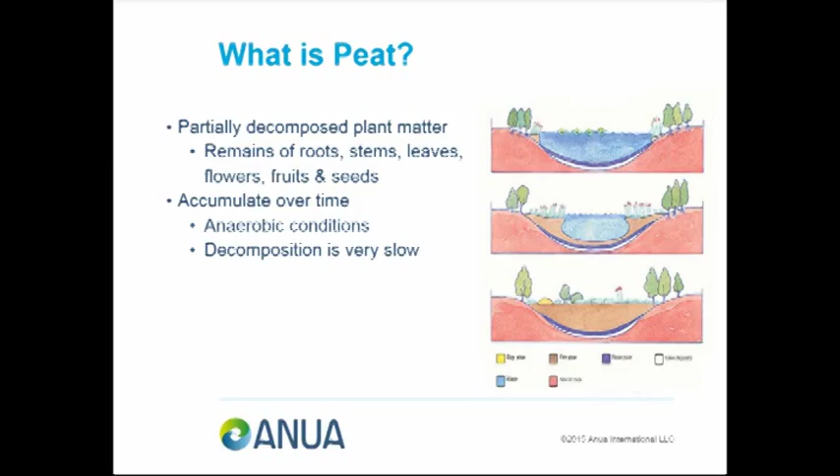So why is the fiber a superior treatment medium? If we compare it to the North American peats, whether it's fiber or sphagnum, you'll see that the lignin content is twice as much. So one of the common questions with peat filters is how long does the media last? Because it's an organic material, and over time it will slowly decompose. So with the high lignin content, over 50%, the Irish peat will generally last about 15 years.

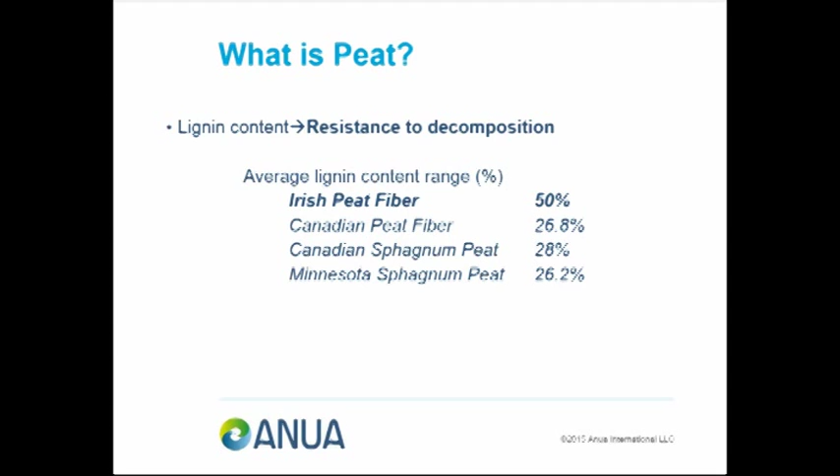We've had many systems that have gone over that. Sometimes systems go less than that, but on average we say 15 years. And if you compare that to the different North American peats, it's about twice the lifespan. So a lot of times you'll see from other manufacturers, it might only be 7, 8, 9 years, something like that.

So there's been a lot of studies that were done actually in the late 90s and the early 2000s. If you've been in the industry a long time, you can remember the 90s was a time when there was a lot of research going on. A lot of universities were involved in different research. And so the University of Minnesota, where they actually have a lot of peat resources, actually wanted to study all different types of peat and do different configurations of peat filters to see how the performance compared.

And so the summary of all that study, which actually lasted 5 years, was that the coarse fibrous peat was actually the most preferable. And of course, like all media filters, we always have a balance with any media system. We're trying to maintain oxygen transfer as well as move the effluent. So it becomes a game. If it moves too fast, then we don't optimize treatment. We don't have time to do what we need to do.

If the pores are too small and it moves too slow, then that leads to clogging, which if you've ever dealt with different media filters, whether it's even a mound system as a media filter, sand filters, you've probably witnessed clogging of those filters. You can even think of soil as a media filter even in a conventional system. So, one of the things that's great about the peat fiber is it maintains those air spaces and channels.

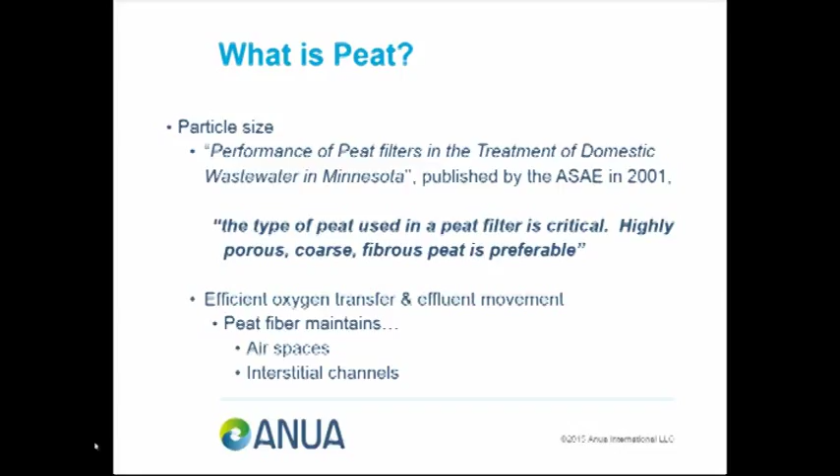And as you'll see here in a minute, the next slide, you'll notice how the properties of it facilitate both of those. So we retain water 36 to 48 hours, which of course is much longer than most other types of media. And you'll see later that's one of the reasons why you get really good pathogen removal as well as very high ammonia removal. The void space, of course, is very high, well over 90%. There's a high surface area.

And then the big kicker with all of it is the cation exchange capacity. So with a natural media, it actually is charged. You can go to the store and buy air filters that are electrostatically charged. They're there to grab particles out of the air as it goes through the air filter and attract it to it. And the same is true of a peat media. You're going to attract and hold molecules so that it actually can be further transformed or will actually be adsorbed and bound.

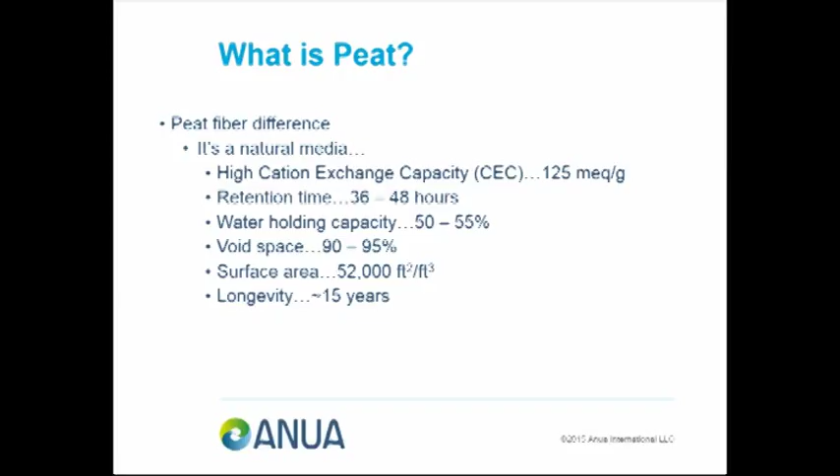So if you compare, just to give you an idea, when you look at that scale of 125 milliequivalents per gram, that's a very high number. If you compare that to sand, like a very sandy soil or just sand, like concrete sand, that would be very low, single-digit numbers, probably 0 to 5, somewhere in that range. So we got a little video here for you that is going to show you an overview of how one of these systems works.

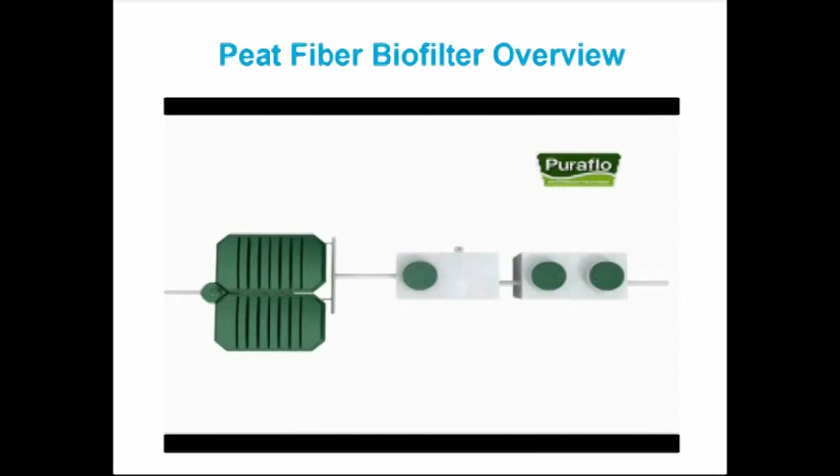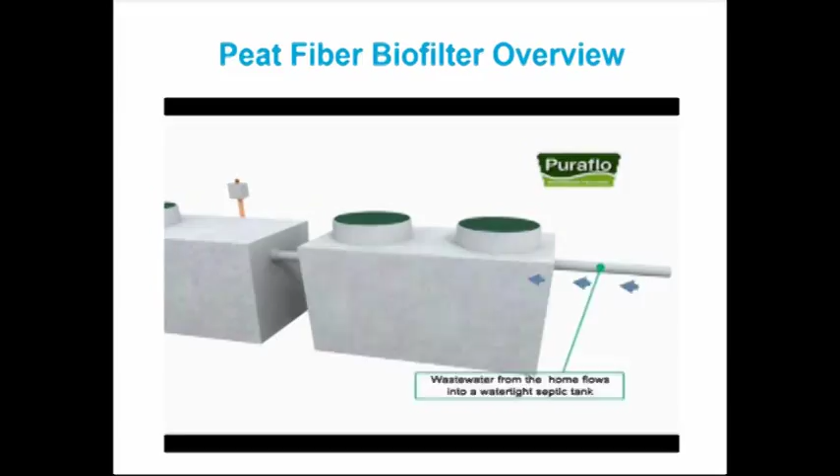All right, so you see the overview, bird's eye view. So basically we're just going to start with a conventional septic tank. These are typically going to be sized to state code or county code, or local code. And so obviously we want it to be watertight. That's critically important. You'll see that this is a time dose system, so if we don't have a watertight septic tank, in addition to treatment problems, it's going to create other problems for us as well.

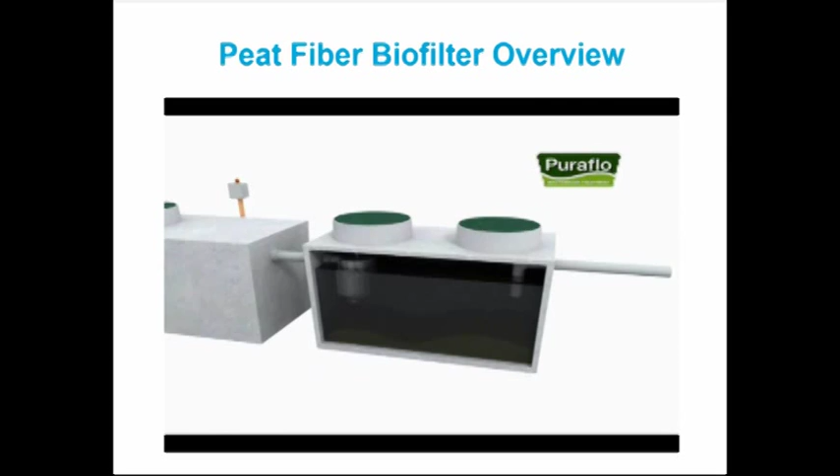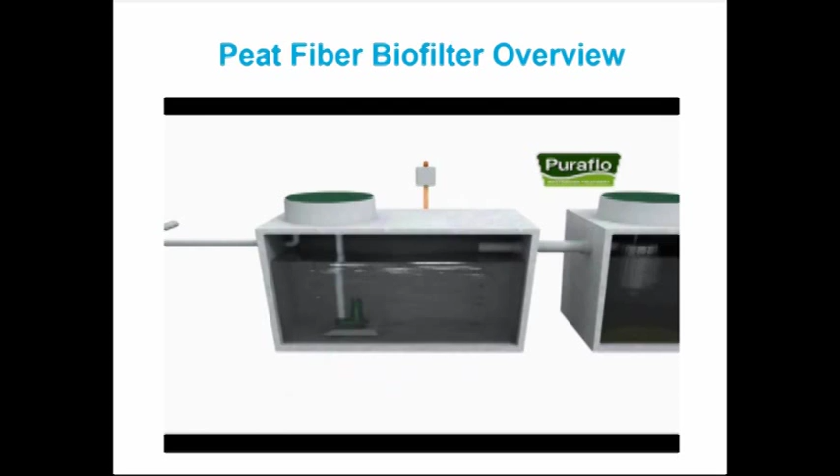And then that flows into a time dose pump tank where we typically are going to dose once every 2 hours. It's a single pass system generally. We do have recirc options available if you need enhanced nitrogen reduction. But normally we're going to use a low head effluent pump, which is all you need, because the most that pump's going to be running in a day is maybe 12 minutes or so. And then you're going to dose the peat fiber media.

You see the manifold there, and so the pressure point is actually the little union there. There's a 1/2-inch orifice disc, and that's where you're actually going to design to pressurize. So in this case, if you have 2 modules, it's equivalent to pressurizing 2 1/2-inch orifices. And then this shows the piping method. So if you had a separate dispersal field and you went out to, say, gravel trenches or chambers, or if you wanted to collect it to pump to drip, then you would use this methodology.

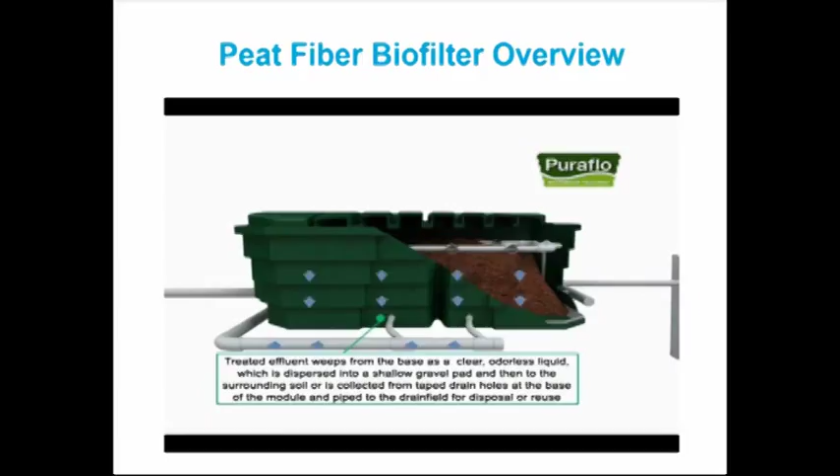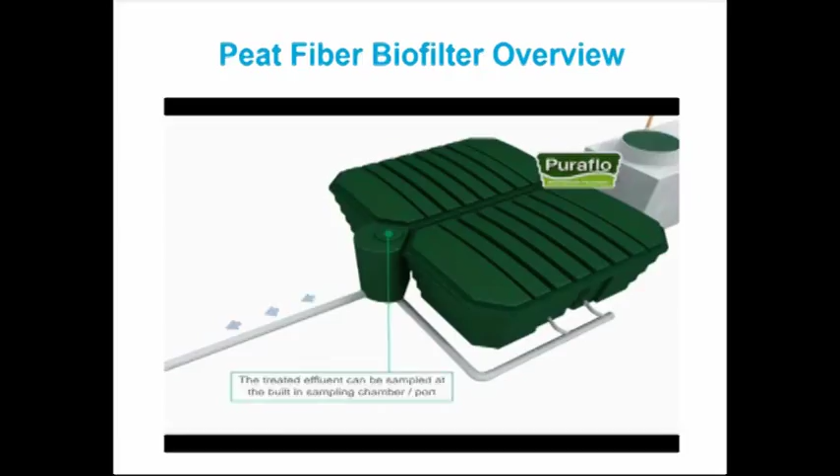The more popular method that we typically see is with the weep holes, where the base of the module has weep holes all around it, and we have a gravel pad underneath it, so the modules are actually sitting directly on top of the drain field. And then one of the things we always try to advise people is to have the sample chamber. We want to be able to see the effluent. We want to be able to sample it if necessary, and so it's critical that you have a way to do that.

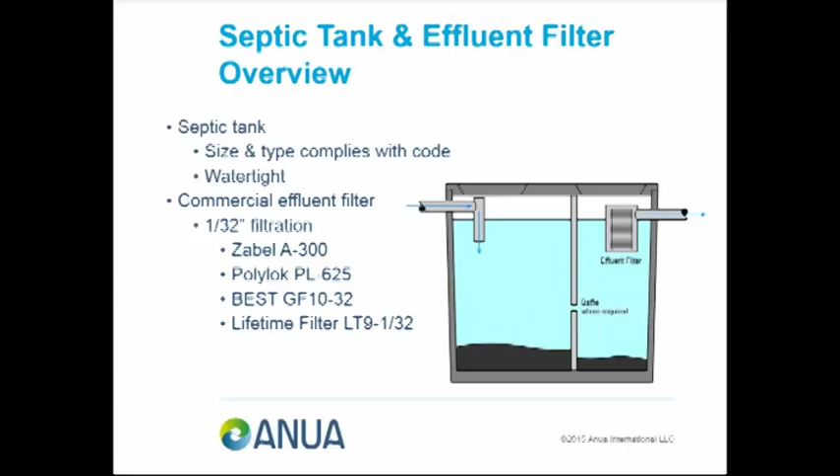All right, so the first part of a system is a septic tank, as we mentioned, so watertight, sized to code. The next key component is the commercial effluent filter. We've had commercial effluent filters in our systems for over 20 years. One of the questions we get is 1/32 filtration is very small, and have you seen issues with those filters and clogging? Fortunately, one of the things we have is experience of time with this system. Because they're a commercial filter and they have a lot more area than like a 4-inch filter, we see the maintenance frequency goes pretty long on these, and also you get the better filtration. So there's just a list of the companies or models that are 1/32 filtration.

And then the pump tank, again, this needs to be watertight. One of the things that we do is we have a separate pump tank from the septic tank. One of the nice things about this we found over time is that you just don't deal with the nuisance high water alarms that you might with other systems that tend to combine everything in one tank. So when you have all that surge volume, it's really nice for when they're having parties or people over, that type of thing.

So typically, like we said, it's going to be dosed 12 times per day. That's only if the flow is there. So in a low flow situation, it may not even be 12 times a day, but it's going to be a 2-hour off cycle. The key part of it is just to separate in your mind the dosing rate and the dosing volume. Each module, which you're going to learn about here in a little bit, is 7 to 12 gallons per minute for the pump, and the dose volume is 5 to 15 gallons per dose per module. So those are two ranges of numbers you need to be familiar with if you design a system.

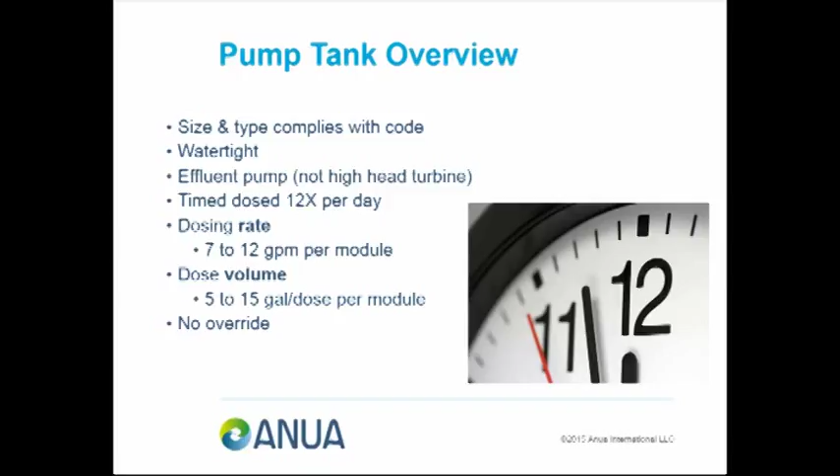The other thing we like to do is have no override, and we do that for a few reasons. If you override a system, obviously you can throw a lot more water through your treatment and onto the drain field. That's not a good thing, because you don't optimize the treatment. And also, really, it's a violation of the permit conditions, because most permits are rated at a max flow per day, and you could end up with an override situation where you might be putting thousands of gallons a day through a system potentially. So we highly discourage use of override floats in the system. All right.

And that just shows you a general picture of how we would see a pump tank set up. Now, some people get a little creative. You can combine, like Jensen, of course, is a big concrete company. They have the ability to manufacture the septic and pump tank into one tank. I don't think that's an issue for them. Most of the time, though, you'll see them as separate tanks. But it's a really basic setup, low maintenance, not a lot to deal with other than the floats working and making sure the pump works.

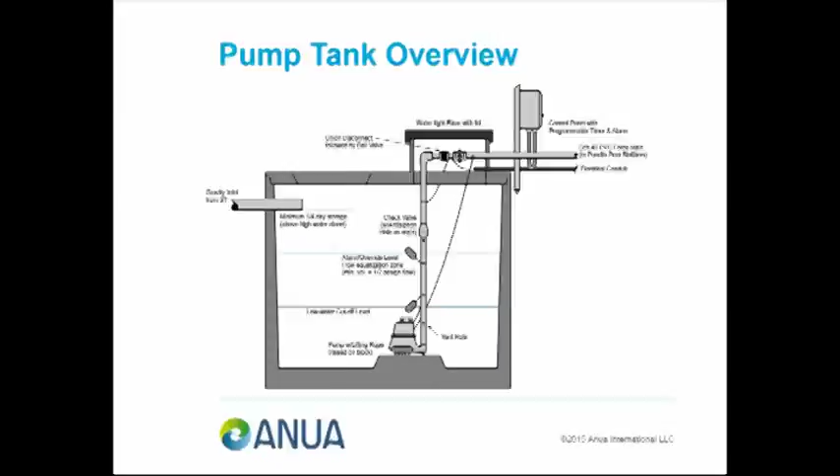As we mentioned with the cation exchange, one of the nice things about the peat fiber treatment is you get all 3 types of treatment. All the alternative systems or advanced treatment systems are typically going to do biological treatment. That's kind of a given. When you get into the media filters, you also get the physical filtration and absorption. And then with the peat, you get the third benefit, actual chemical treatment, where you get adsorption and ion exchange.

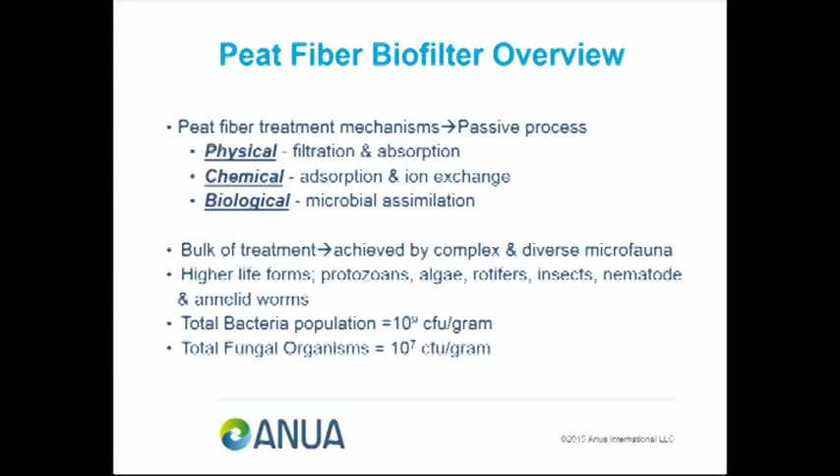So it's probably the only technology, these natural media filters, that actually gives you all 3 types of treatment. One of the things you'll see is it's not uncommon, if you're doing maintenance, to see higher life forms inside the filter. You get beyond just the foundational level of bacteria performing the treatment. You move to higher chain organisms that are actually better at treatment and produce less waste, so that's a benefit. You have a lot of biology going on there. You'll see a lot of bacteria, fungal species, things of that nature.

And of course, in most media filters, the top portion is where you do your carbonaceous breakdown. Normally the chain of utilization is carbon, nitrogen, and phosphorus. That's why you see carbon come out in the top part of a filter, and in the bottom the nitrifiers populate because they can't compete with the organisms that take care of the carbonaceous waste. So typically the deeper parts are where you'll see nitrification, and in peat filters you'll see little pockets or microsites with anoxic areas, which provide denitrification because you have an organic source available.

So even in single pass, we'll typically see nitrogen removal anywhere from 25 to 40%. And when we go in recirc mode, you'll see nitrogen reduction levels upwards of 70%.

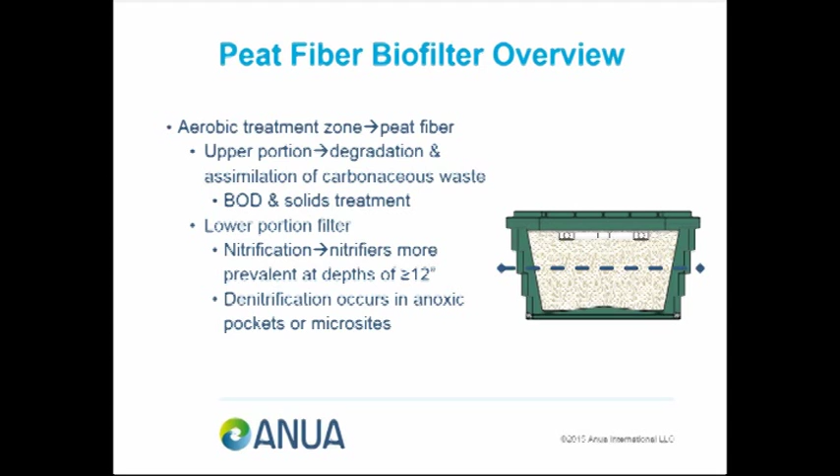Hold on just a second. You have to excuse me. I'm up in Ohio here, and there's something blooming that's really hitting my allergies.

One of the real benefits that sets peat filters apart is the antimicrobial properties, or what you would call microbial antagonism. With that retention time of 36 to 48 hours, you have a long time for stuff to work in there. The peat lowers the pH, and that lower pH has an effect on the pathogenic bacteria and viruses. With the fungal species, you also get some benefits. So we see very high levels of pathogenic bacteria removal and 100% removal of viruses.

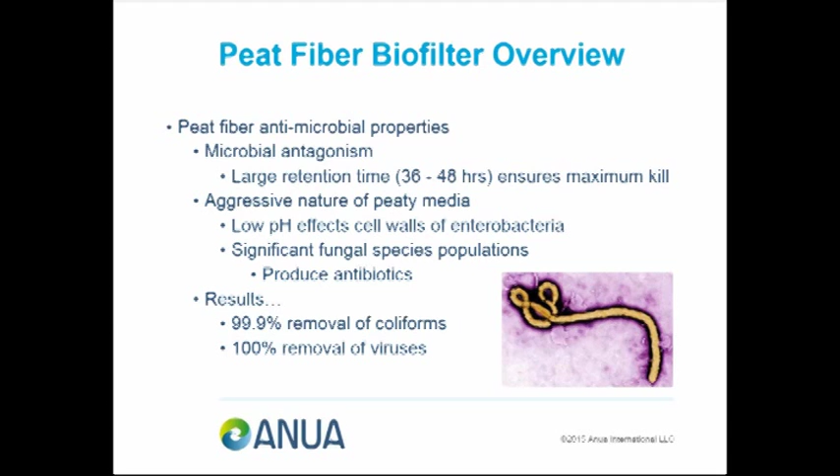When this was first researched back in the 80s and early 90s, they did tracer studies, and one of the studies on pathogen removal showed very high levels like what you're seeing there. There was a study done in Minnesota later in 2000, and just for disclosure, this was not the peat fiber from Ireland. It was another peat from Minnesota, but it demonstrates the difference between peat and sand in terms of removal of viruses.

You see there's virtually 100% removal of viruses both summer and winter. In Duluth, Minnesota, they're very interested in how systems perform in cold weather because they have cold weather 8 months out of the year. If you compare that to sand filters, you'll see there was a drop-off in the wintertime. The other interesting thing, if you go to the next slide,

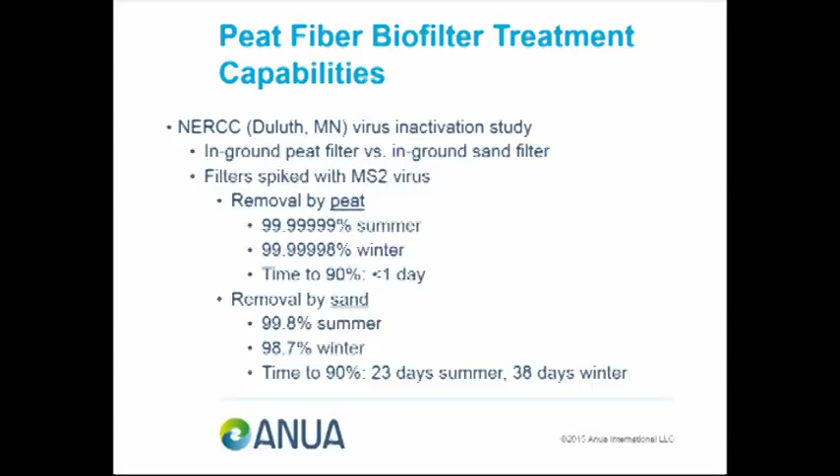is it shows how long it takes for virus inactivation. In peat, you tend to see virus inactivation in less than a day. Compared to sand, it takes upwards of 23 days plus to see over 90% virus inactivation.

This is all very interesting because we try to talk to people about treatment beyond BOD and beyond suspended solids. We want to get into other things, and it becomes very important in water reuse to know about pathogens, nitrogen, and other emerging contaminants, depending on how people are going to reuse the water.

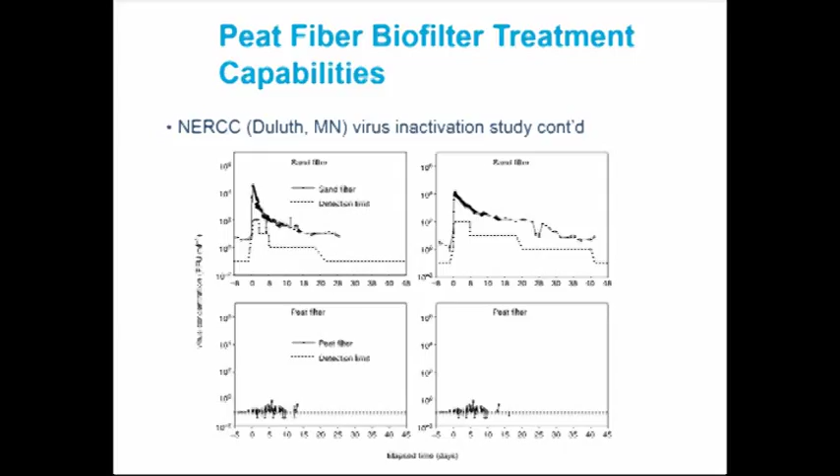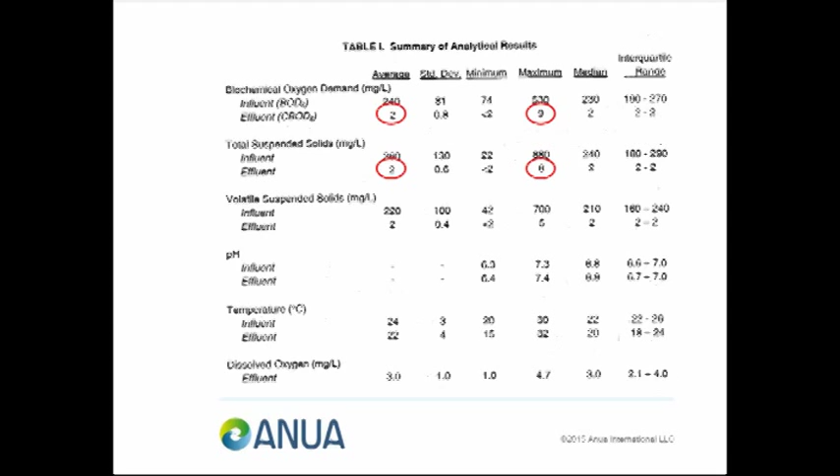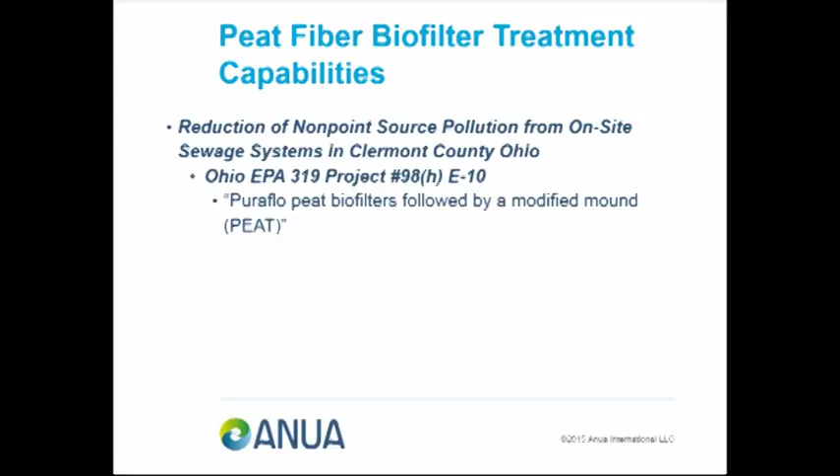So we've been part of a number of third-party studies all across the country. A lot of these took place in the late 90s and, like we said, early part of 2000. One of them was in Ohio, down in Clermont County, which is outside the Cincinnati area. And it was funded by the Ohio EPA as a grant project. And they had 8 systems that were actually Puraflo systems, followed by shallow profile mound systems. And you see the next couple slides here, we'll see the results.

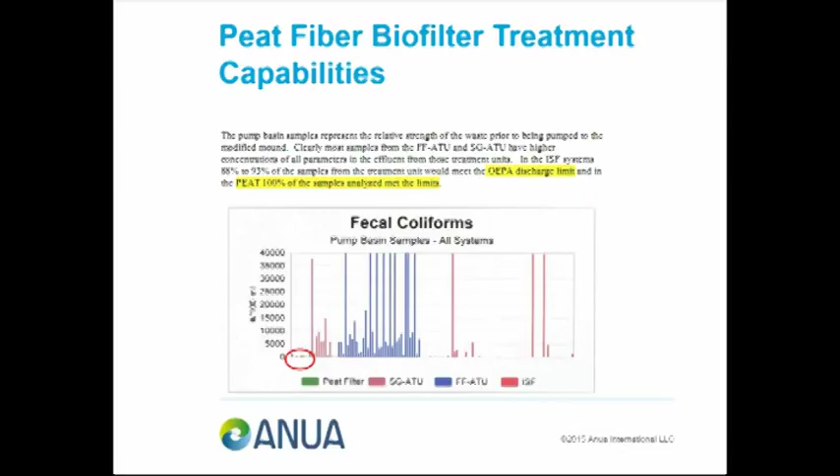So the first one is the fecal coliform. The peat filters were the only ones that 100% met the limits of the sampling limits that they had. And in this case, the sample limits that they had on fecal was 2,000. And you can see there was a suspended growth ATU, fixed film ATU, and an intermittent sand filter. And you can see the difference there in the graph.

The next one was ammonia. So Ohio is a big direct discharge state. They do a lot of surface discharge to ditches and streams, and so they're very worried about the ammonia. And again, it was the only system that 100% met the samples. Currently in Ohio, those numbers are very low. I think back at the time when this took place, it was 2 and 4, 2 in the summer, 4 in the winter. And you can see the difference between the Puraflo and the other technologies.

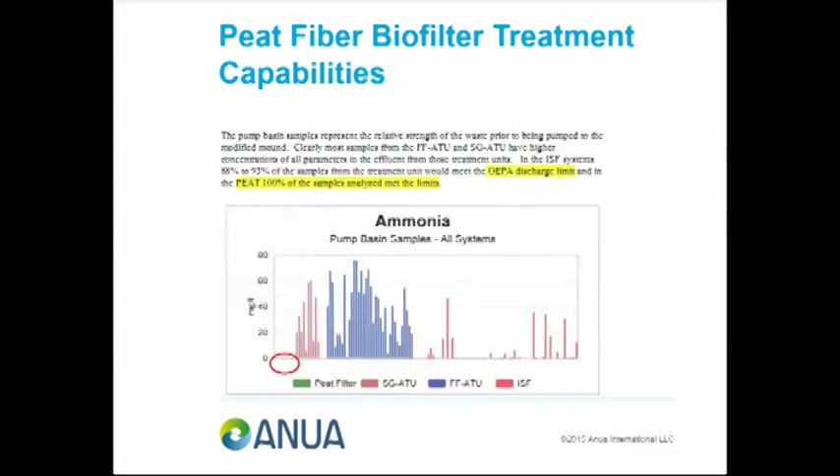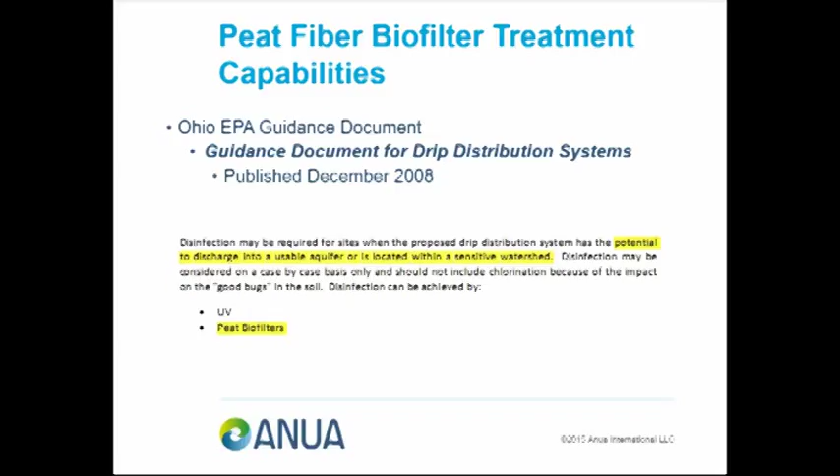And in the drip distribution guidance document that the Ohio EPA published, they actually have this statement, which we found a few years ago, which is very interesting. It talks about discharging in sensitive water tables, because it's not uncommon to get water tables up here in northeast Ohio that may be 6 to 12 inches below the surface. And so they don't want to obviously put chlorine in those situations, so it discusses other types of disinfection methods, and one of them it lists is peat biofilters, which is very interesting.

So the next part, we're going to move on to the soil and the drain field. So we like to talk about that the Puraflo is actually the circuit breaker or the fuse for the drain field. So what you don't want to have happen is your treatment system not perform reliably to the point that you still end up plugging the drain field or having clogging issues or hydraulic issues. So we feel it's very important to be able to manage that, and Puraflo allows us to do that.

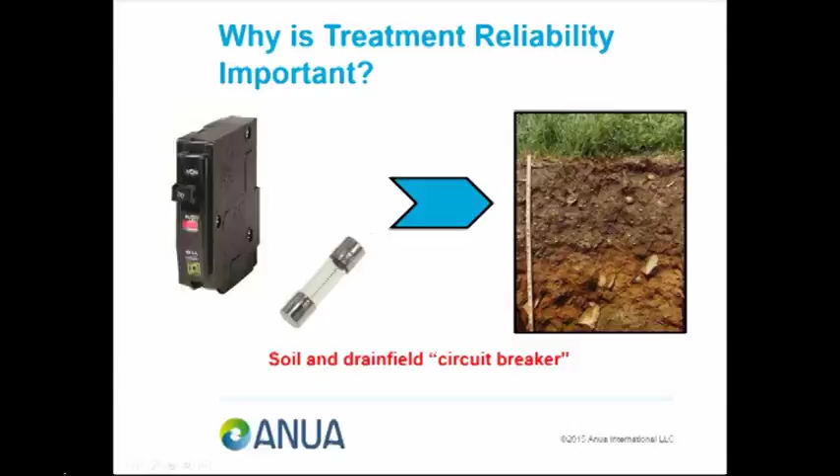We have another poll question here, so let me open that up for everyone to see. And the question is, in your local market, do you see more opportunity for repair work or new construction? So I'll give our attendees a few minutes to answer that. Okay, it looks like all the answers are in, and we have 29% of our audience saying repair work and 71% new construction. Interesting. All right.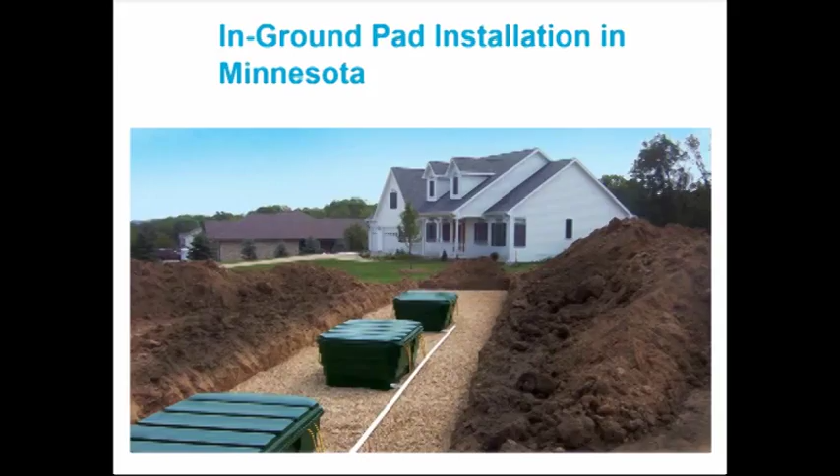So then moving on to the next slide, this is a site up in Minnesota. Obviously you don't see the septic or the pump tank, but this is a typical configuration where you would have the gravel, what we call the in-ground pad, beneath the modules. Just ignore the color of the gravel. This particular gravel is tan for some reason, but I know most people's is gray. And then you would just space the modules evenly throughout that pad, and then you have the pressure manifold coming in, supplying the modules from the time dose pump.

So it's really simple. So everything will be backfilled, and you'll see some pictures here in a minute. The only thing that is on the surface is the lids, which are accessible for the service provider to be able to see what's going on in the filters.

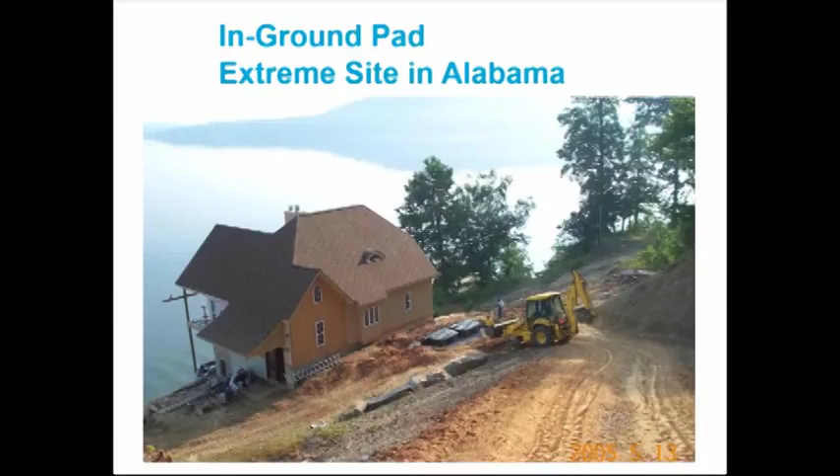So this site in Alabama is typical of the situations we get into. Heavy slope on a lake, no room. Matter of fact, I just worked with an engineer in Mississippi that worked on a site with a 45% slope. They notched into the 45% slope hill, cut out a bench for the house and the Puraflo system, and then that was it. So we deal with what we like to call extreme sites all the time. So you see the modules in the front yard with the gravel beneath it; that is the treatment and the drain field in that small space.

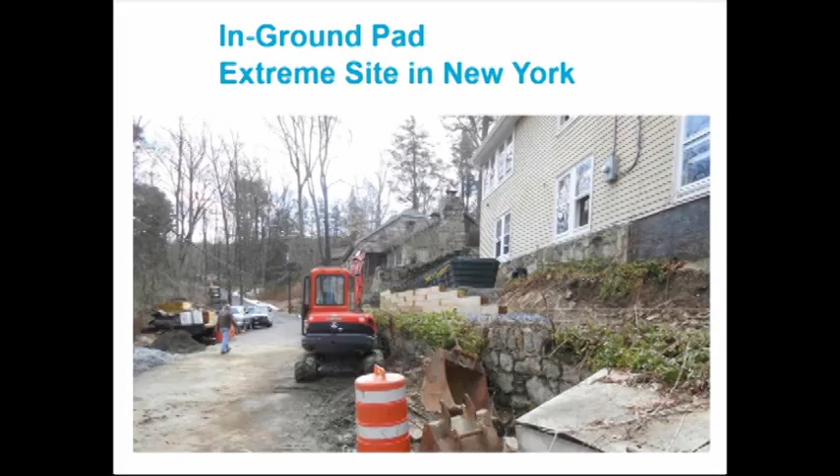And then here's a site in New York. So it's interesting, the poll that we took. This is a repair site, and that's all the space they have, next to the house in between the street. And so that is the modules with the drain field. That is your treatment and dispersal system right there.

So now we'll talk about mounded pads. So those of you that are familiar with Wisconsin mounds, where you scarify the native soil, you lay some sand down, then you have a gravel layer, and typically you would have a pressure manifold there supplying from a pump tank with septic tank effluent. So what we do is we put the Puraflo modules instead of the pressure network. Now you have treated effluent going into the mound system.

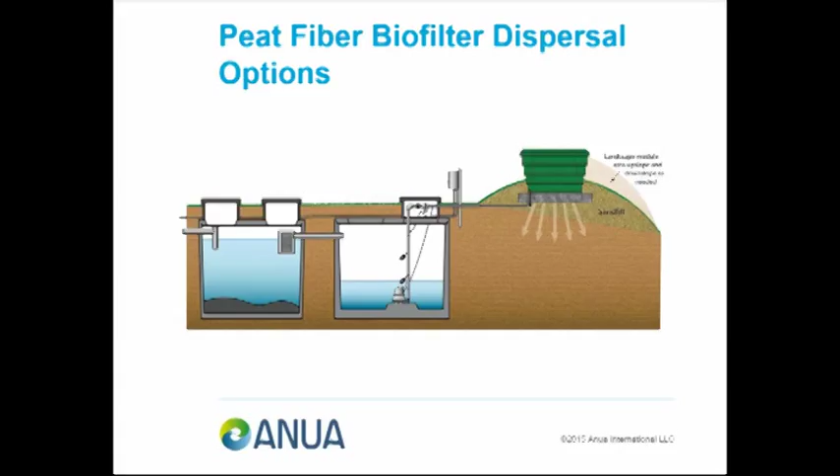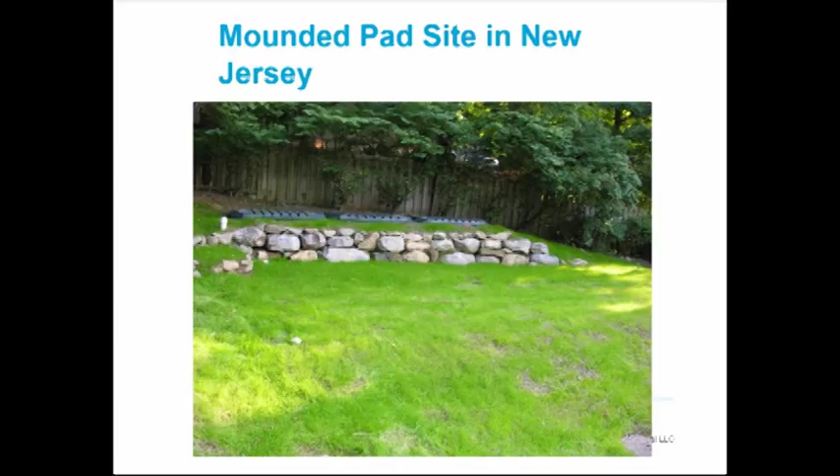So your mound ends up being smaller because the soil application rate's higher, the sand loading rate's higher, and the vertical separation is less. So if you get in situations where you have very shallow soils and limiting layers, high water tables, maybe you have bedrock at 12 inches or 24 inches, then you can elevate the modules up out of the ground and build a mounded pad out of it. And here's a site in New Jersey, and they did some landscaping with some rock. You can see how this is elevated above the ground in a mounded application.

And this is here in Ohio; this really gives you an idea of what the difference is. And I know there's counties in California that actually do mound systems. So the one in the background is a house that's on a conventional Wisconsin mound. So it'd be septic tank, pump tank, then sand mound. And then in the foreground is the mounded pad. So it's the Puraflo with the gravel, then a little bit of sand. And so you get to see the difference of what doing the treatment does. It cuts down the size and the height of the mound greatly.

And so if you're familiar with Tyler table and linear loading rate and spreading the effluent along contour, we design to all those factors. And you see here what the difference is. And that's how we're approved in Ohio, as an example. So we have to follow that stuff. And this just gives you a really good visual of what the difference is.

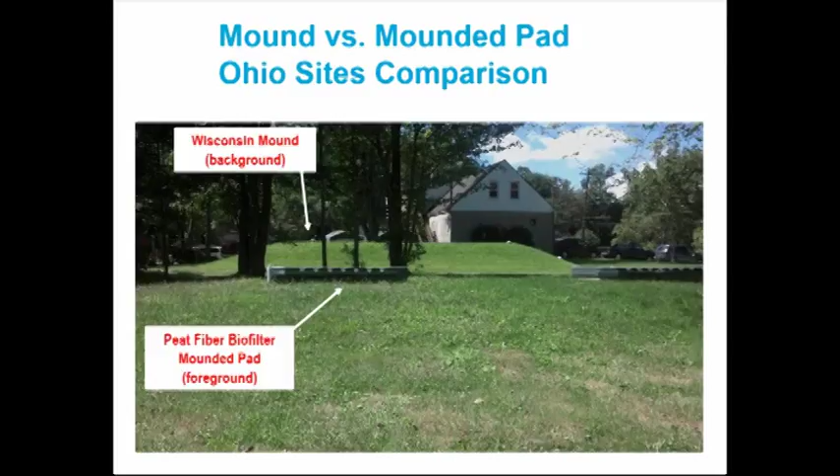So it just so happens that we've had the pad tested as well. So you saw some treatment numbers earlier through the peat biofilter, and now we can show you some data when you get down into the gravel pad and then into the soil profile below or horizontally away from the gravel pad. We can show you some numbers here.

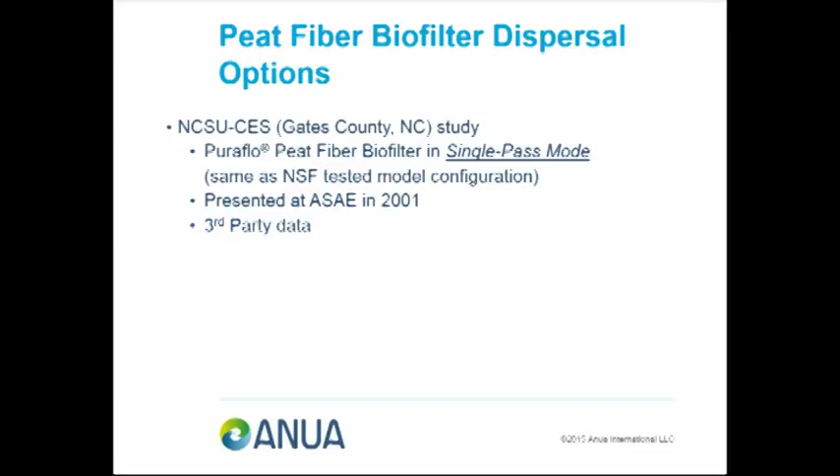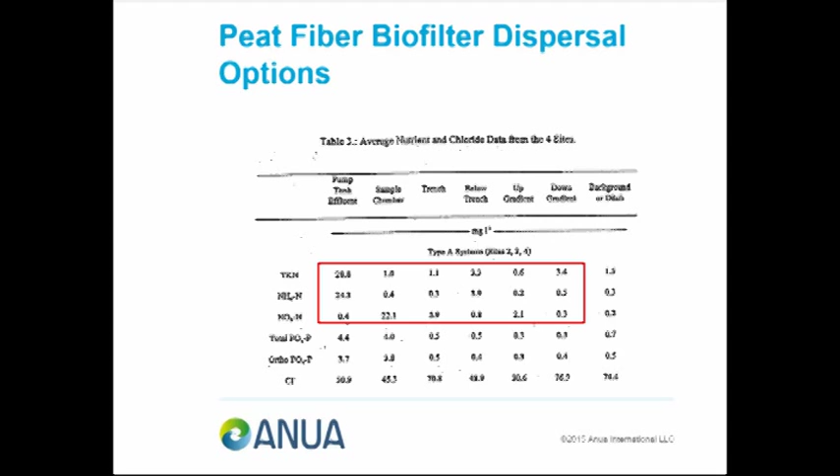And then what's really interesting when you get to the nitrate, the NO3-N, if you go right when you get in the trench in the pad, you see there's a huge drop in that number. So what we see in the pad and then below the pad and down gradient is we see significant denitrification going on.

So one of the studies we had done, we had 24 sites that were tested from July 97 through 1999. And some of these were actually commercial sites. They weren't all residential. So some of them actually had some very high ammonia or very high total nitrogen, very high BOD. And they tested not only the Puraflo treatment system, but this was also a test of the pad. So one of the things we had to do in Virginia was test it in all the different soil groups. So Virginia broke it down into 4 different soil types that they wanted to see, and we had systems in all those different soil types.

And of course you can read the quote there at the bottom of the paper. And just so you guys know, any of these papers that we've shown in here, any of those are available if anybody wants copies of them.

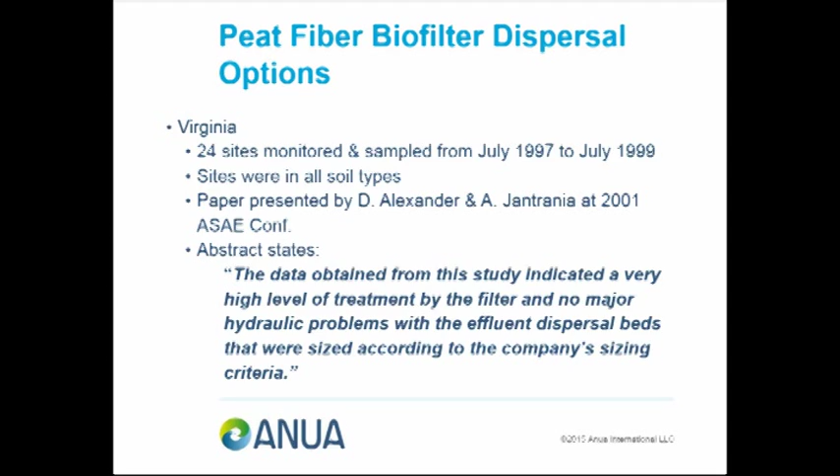So as part of the Virginia study, this data is actually sitting at the U.S. EPA right now. There's actually a subcommittee dealing with the Chesapeake Bay situation. All the Chesapeake Bay states are grappling with the nitrogen. They all have to get it reduced. And so on-site systems obviously are one of the places that have to do reduction. And so the state of Virginia has actually submitted this to this committee at U.S. EPA. And one of the things we're working on with them is getting the combined treatment and soil dispersal system recognized for the full nitrogen reduction that it does.

So what you'll see is it's about a 40% nitrogen reduction through Puraflo, and then from Puraflo through the sample chamber in the pad itself, there's another 58% reduction. And then by the time you get 10 foot down gradient, you're looking at really significant denitrification numbers down in the single digits.

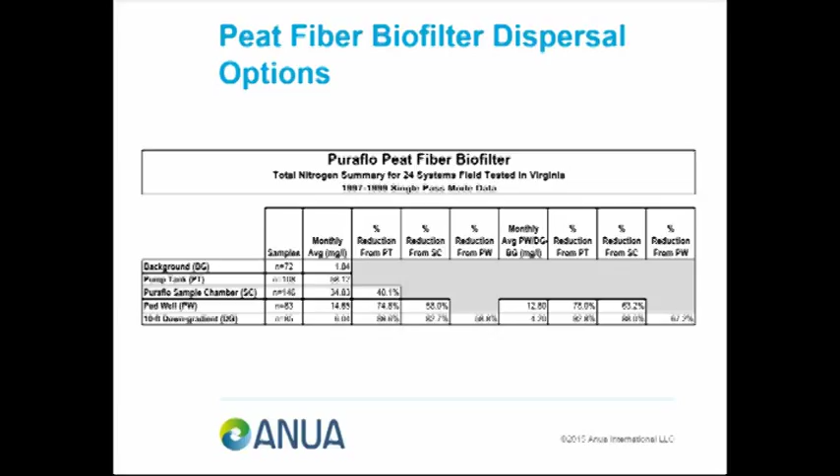So keep in mind that these systems are all very shallow. I know sometimes in California, when you get out west, I used to work in Arizona and live there, we tended to do things deeper, down below 2 feet. So one of the tricks to getting the enhanced denitrification is you've got to keep all this really shallow in the soil profile, typically less than 24 inches. Definitely not deeper than 36.

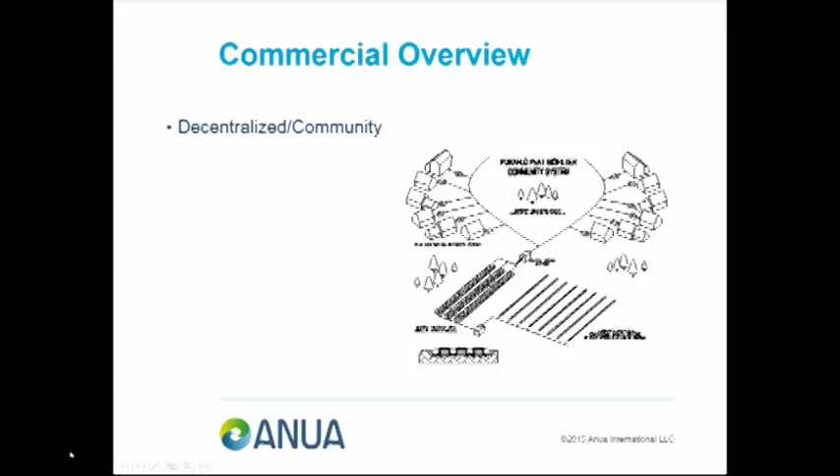So, Colin, we do have a question from Dylan, and the question is, for multiple pods distributed directly on a gravel bed, do you recommend a sampling port on each pod for effluent sampling? No, there's just one sample chamber in each residential system. So it comes out of one of the modules because they're all dosed at the same time, and they all have the same media. So you're just getting a snapshot out of that system.

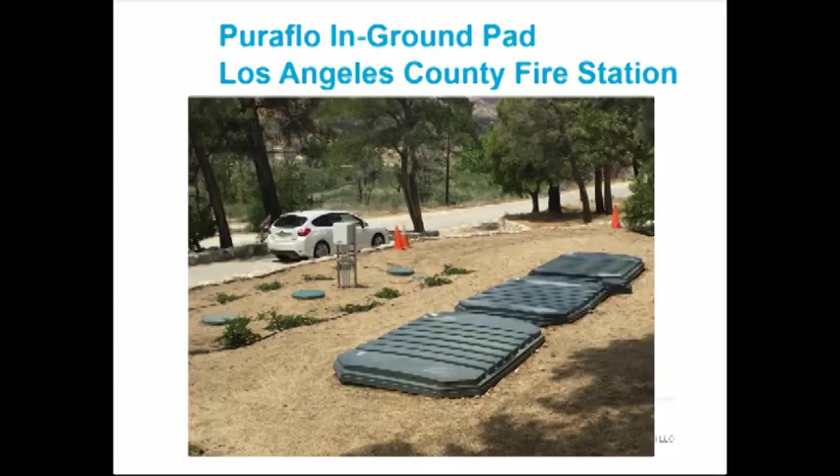So my understanding, and Tanya can jump in here, but I think there's some more of these systems under design in other fire stations in LA County. Is that right? I don't know if she has access to speak or not. Tanya, can you hear me? Yes, we can. Okay. Yes, there are some other systems that are going to be designed. We have more of these on the way in LA County.

Yes. This is an interesting one. This is up in northern New Jersey in the mountainous areas, what they call the tri-state area. So this is a mobile home park that was put in 40 years ago. It actually was a decentralized system. They had conventional septic systems in different sections of the mobile home park.

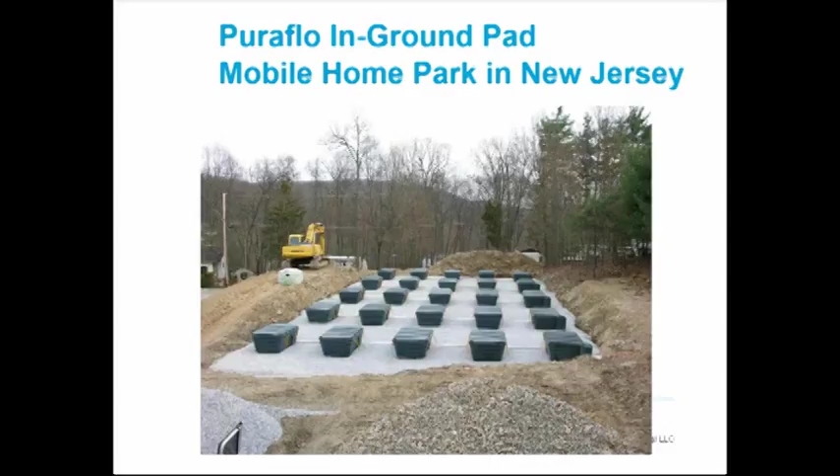And then what's happened is over time, as those have failed, they have very limited area because it's all built out. The mobile homes are very, very close to each other. It's a very isolated spot. They get vacationers from New Jersey, New York, and Pennsylvania. So this will show you one that's a commercial pad, Puraflo with pad dispersal. So this is under construction. This is just one part of the mobile home park, but here you see the treatment and the dispersal field for that part of the mobile home park.

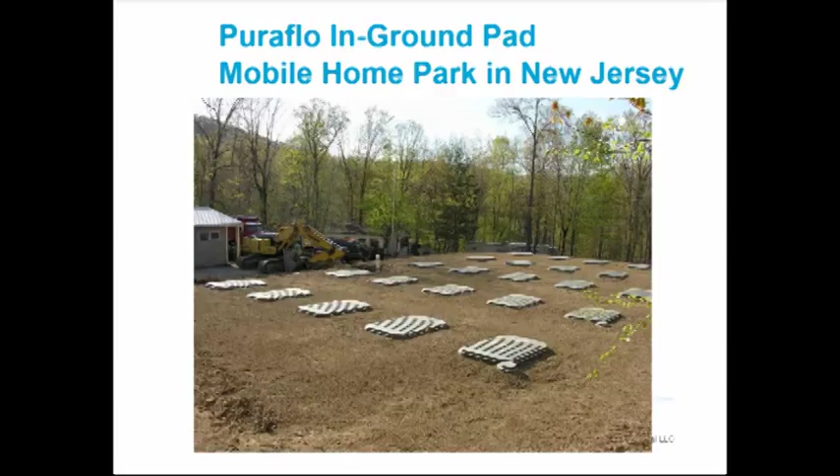And one of the great things we've seen over the last 22 years is we don't have surfacing effluent issues. And we look for them because when we see these sites and the soils, you get concerned about where's the water going to go. But because of the time dosing, and the peat tends to be like a sponge, and we slow weep that water in, we've seen very positive results even in tight situations like this.

So if you want to get further treatment behind another type of technology, we do that routinely, where it becomes a polishing filter for another treatment technology. And this is a project we worked on with Jensen Precast outside of Reno, Nevada. It's actually an Apple data center.

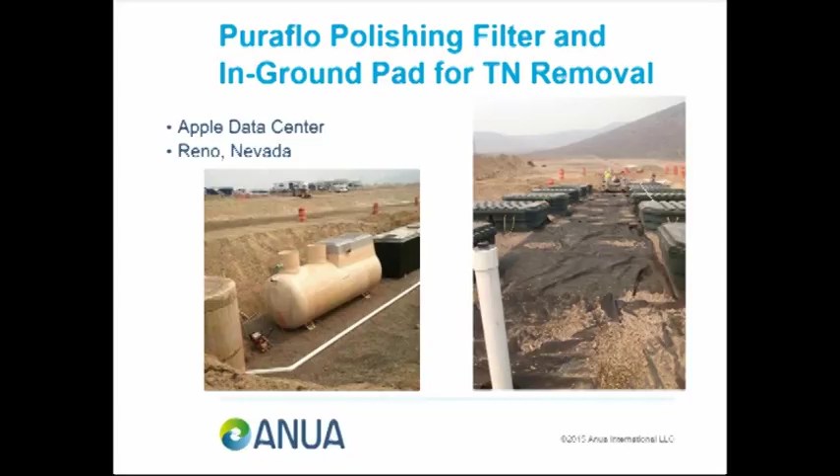And this center serves about 45 employees. And any of you Apple users, this is where all your data is probably being stored.

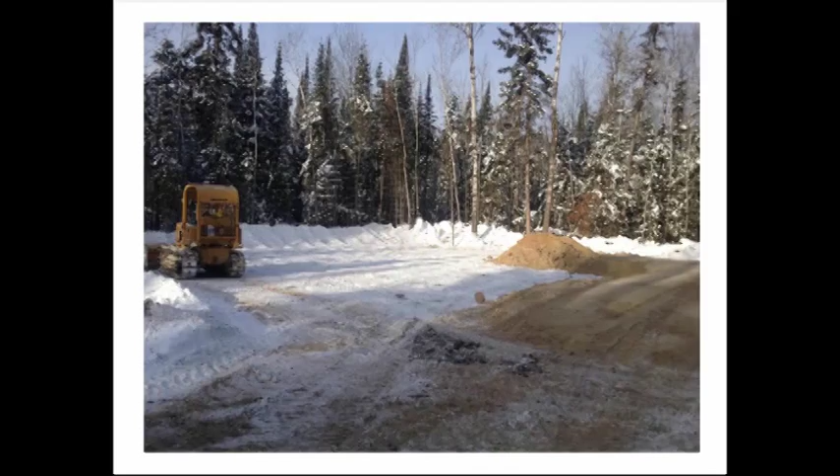But this camp had an existing system that was causing issues with their water supply. And so the Manitoba Conservation, which is the agency responsible, actually mandated that the final treatment step had to be Puraflo peat filters. And so you can go to the next slide. And this will just show you, this is another polishing filter situation. It's an aeration system like the Platinum. Actually, it is Platinum. But this shows you the soils, and keep going to the next slide.

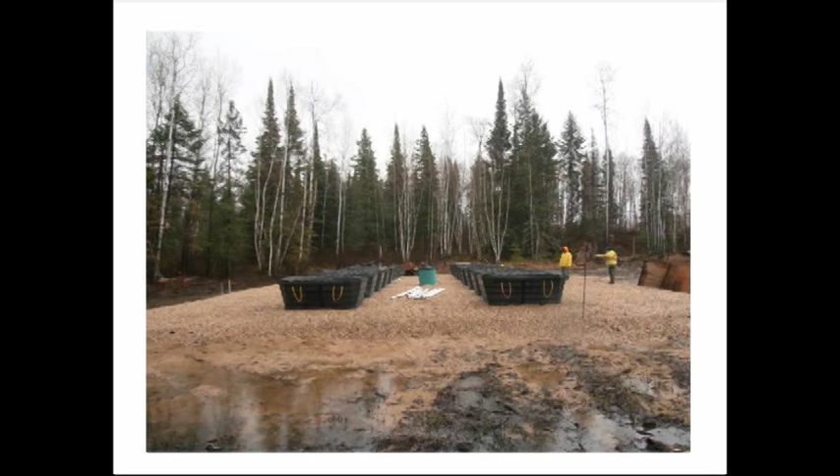And this one's actually a mounded pad. So you can see when they constructed it, if you look in the foreground there, you can see all the water just kind of standing in the soil. So you get in some of these areas, it's just very, very tough soils, high water tables. But that's a mounded pad, so you can see the sand, and then above the sand is some gravel, and then the 15 or 16 Puraflo modules that are there, and that is in polishing mode past an aeration system.

So one of the other great things we have are these Excel design tools. I think it was 78% of the people said they wanted to know more about design tools and those types of things. So this is just a short list of all the different Excel design packages that we have. Of course, we have them for Puraflo. Like I mentioned, you could design a system from start to finish. We have water mounding sheets. You can use them not only for our technology, but for really any type of drain field. So those are very helpful. We have total nitrogen calculation spreadsheets.

If you get into a situation where you have intermittent use, like Charlie and I are sitting at a Christian church camp here today looking at their old system, and they obviously are here during the summer, they're not here during the winter, and they only have campers a few times a year, so in the summertime in between they have some down periods. And so it's very helpful to show and characterize those flows and how that works, and so we have tools for that. The picture that you see there is one of the commercial design tools that we have.

And then we have what we call the QACulator for the quaternary ammonium compounds, which if you get into treating restaurant waste or convenience stores, those types of things, we want to see a prediction on the quaternary ammonium sanitizer, because in low levels that'll have an impact on the system. So we have numerous Excel design tools available, and these have all derived out of questions that designers and regulators have had over the years. And so we developed these to build on what we've learned, what people have asked for, and the whole goal is to try to make everyone's life easier as a practitioner in the industry.

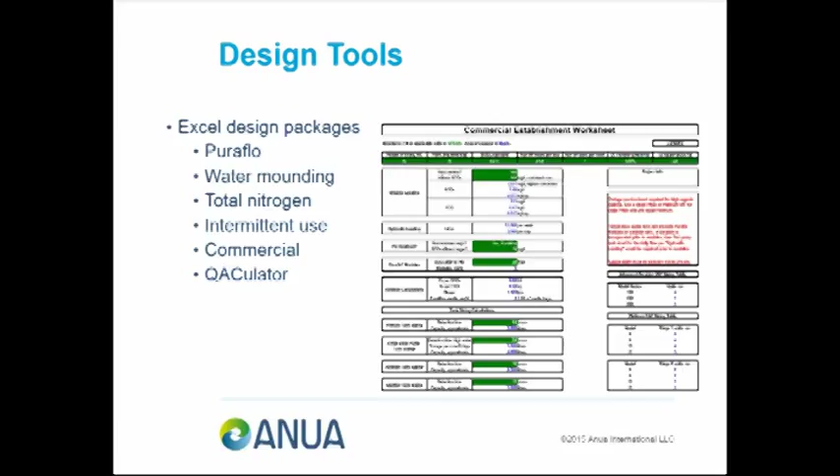We've got one more poll, and I'm going to put that out there now. The question is, how receptive is the local regulatory agency to considering reuse system designs? So I'm going to launch that now and give our attendees a few minutes to respond to that. Okay, it looks like everyone has commented. And we have 0% saying they're not receptive, 60% saying somewhat receptive, 30% very receptive, and 10% extremely receptive. So that's really interesting. Yeah, excellent.

And we do have another question, and then I'm going to open it up to our other attendees to ask some questions. The question is, what are the requirements of replacement of the septic system parts, including biofilters, and does Jensen do the repairs and replacement? Mike, you want to take that? Can you read me that question one more time? Absolutely. What are the requirements of replacement of the septic system parts, including biofilters? And then does Jensen do the repairs and replacement?